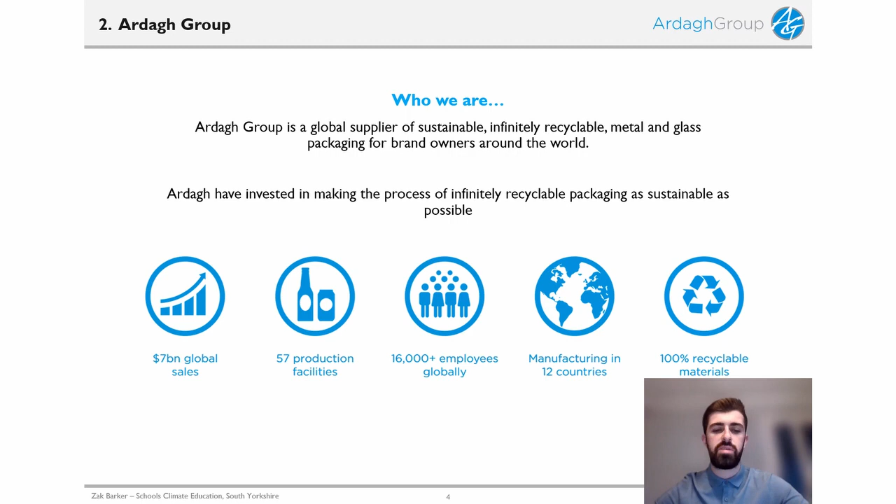And all of the products that they make are 100% recyclable. So everything is packaging, from glass packaging to aluminium packaging, so cans and glass bottles. At the Barnsley site, we focus mainly on glass containers for the drinks industry, alcoholic drinks industry, but we still tend to do a bit of Coca-Cola or Fever Tree tonics and stuff like that.

So this is bread and butter flat glass making. This is an 18 section glass forming machine at Barnsley where I work. This machine at the moment is producing Heineken bottles, I do believe, and it never stops. You can't stop a glass furnace, unless it's like once every 15 years where you're going to stop it and build a new one. So this machine is just continuously running. We never stop it, apart from occasionally maybe once every month, once every 2 months for a couple of hours to do maintenance work or change the job over.

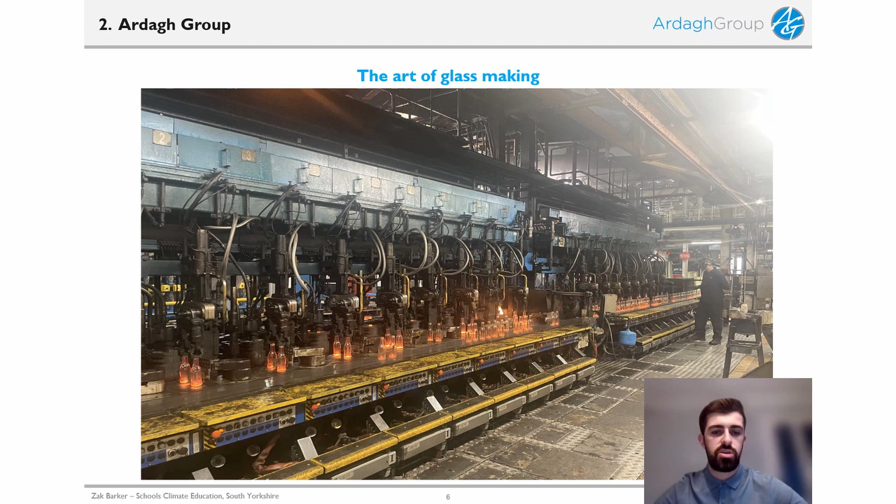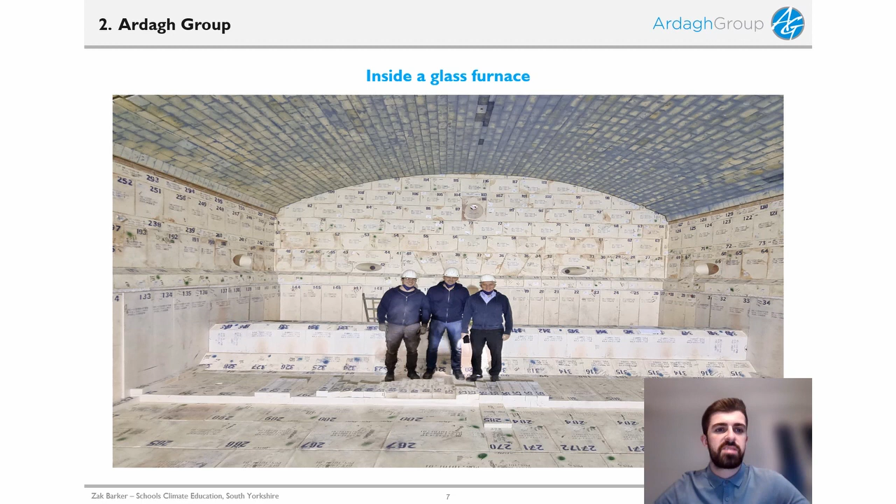This is inside one of the furnaces. It needs to be this large because of the amount of glass that we're making. So what happens in the furnace is you've got all your main ingredients of glass, you get it to your desired temperature, and then it's distributed out onto the machine. In here it can reach a maximum of like 1600 degrees Celsius, and then your glass drops into your machine at between 1200 and 1400 degrees Celsius, dependent upon colour, weight of the glass, size of the glass container, stuff like that. So it's a very hot process with lots of excess heat that never stops.

So the sustainability plan at Ardagh, what are we hoping to do? We're hoping to minimise greenhouse gas emissions, over all industry, but obviously my focus is at Barnsley as that's where I'm based. Minimise our ecological impact and engage with local communities.

So if you'd just like to pause this video and have a think before I move on, so if you can think of any benefits of studying through the apprenticeship route like I have done, whether that's intermediate apprenticeships, advanced or higher degree apprenticeships like I'm currently on, if you can think of any benefits to that as opposed to the regular route, if you'd just like to pause it here now.

So if you've done that, general benefits, which I've got from my personal experience: obviously you earn while you learn. You're attaining invaluable working experience at work, so in your practical role day to day, going into the factory like I have. But you've also got that theoretical knowledge which you're picking up at college or, for me at the moment, university. And the main biggest benefit of that is that you're becoming familiarized with the industry that you're in. So you spot key opportunities for improvements, you understand how things work better.

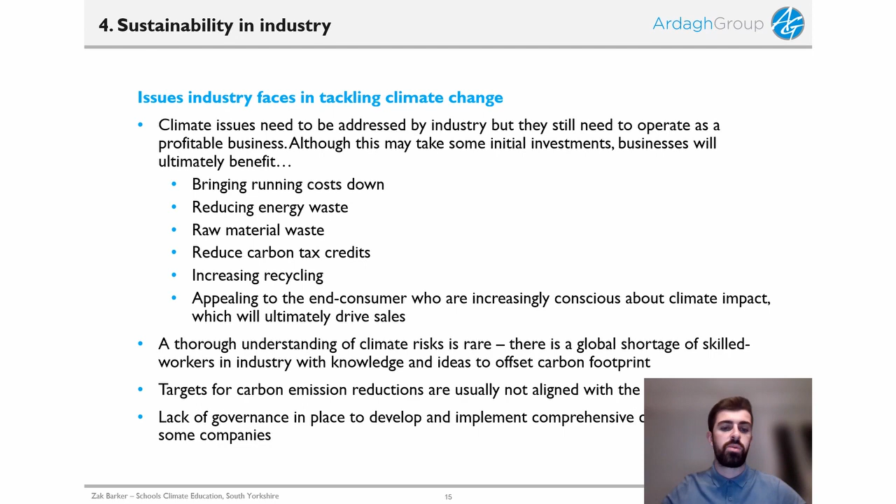So there are multiple avenues that businesses can take to reduce climate change. So, I mean, you don't even have to work in an engineering environment like me. You could work in HR, there's lots of different things that you could do. I mean, just considering and caring. So, cycle to work schemes stop people driving to work, or installing electric vehicle charging points, which is influencing people to get electric cars as they can charge them up at work for free.

Looking at recycling, looking at logistics. So companies are introducing green bonus schemes to staff who are driving sustainability, or by working directly in a sustainability role, which I'm doing at the minute as a project maintenance engineer on site. You can influence the use of resources to prevent further damage to the environment, tackling waste heat recovery.

So obviously, glass industry, like I've mentioned, it's a really hot industry. So a lot of that heat at the moment is wasted, and that's wasting energy. It's wasting money basically. So looking at how we can reuse that heat to the company's benefit, but it's also to the planet's benefit because we're not wasting energy. By reusing that, we're cutting down on energy that we're using from other places.

Engaging proactively with the community, so educating people on sustainability in industry, going into schools, talking to people, involving the community with what's going off on site, how we're tackling climate change. It encourages other people to tackle climate change. There's lots of different ways and avenues that this can be gone about.

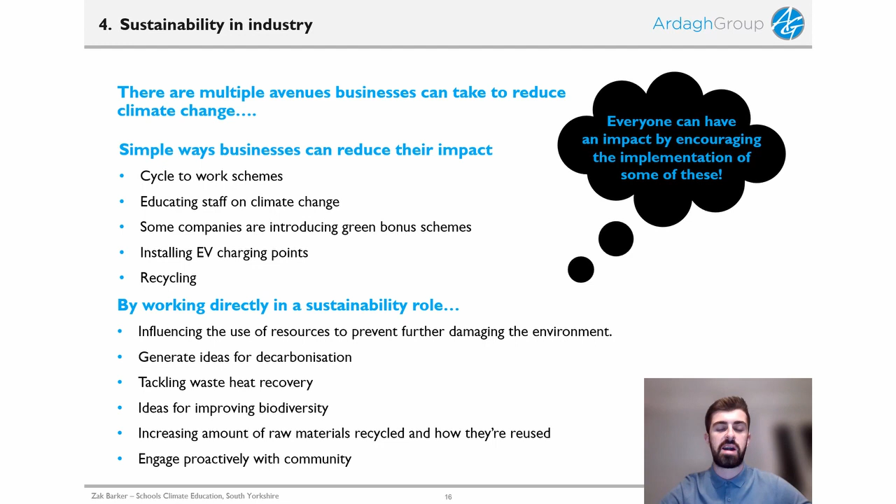I realise I've been doing a lot of waffling and not a lot of showing you what impact I've actually had. So current projects today, I've taken 420 tons of CO2 every year now out of the atmosphere, which is equivalent to the CO2 produced by 155 households every single year. So over 10 years, that's like 4,200 tons of CO2 taken out of the atmosphere, which

is massive. And for someone who's interested in climate change like I am and cares, it's an added bonus to your job that you feel like you're making an impact and that you're not just going to work and picking up a paycheck. You're actually making an impact on problems that are real life, out there outside of work, and that everyone's facing.

So my role, what it involves: I've already spoken about projects and how I identify gaps at work for efficiency, sustainability targets, and how we go about that. Some of the other things I do is look at improving all the technology, making it greener. I do this by designing systems, looking at alternative methods, using what I'm learning at university, what I've learned already at college on my apprenticeships, and the time I've spent in industry. I can look at different ways to target things.

So looking at alternative energy methods, doing pre-feasibility studies, understanding how much the current systems are costing at the moment, and then looking at how we can make that cheaper, greener, better for the environment. Obviously, we can promote that then, which makes us advantageous as we look like a greener company when we're trying to attract customers and more work.

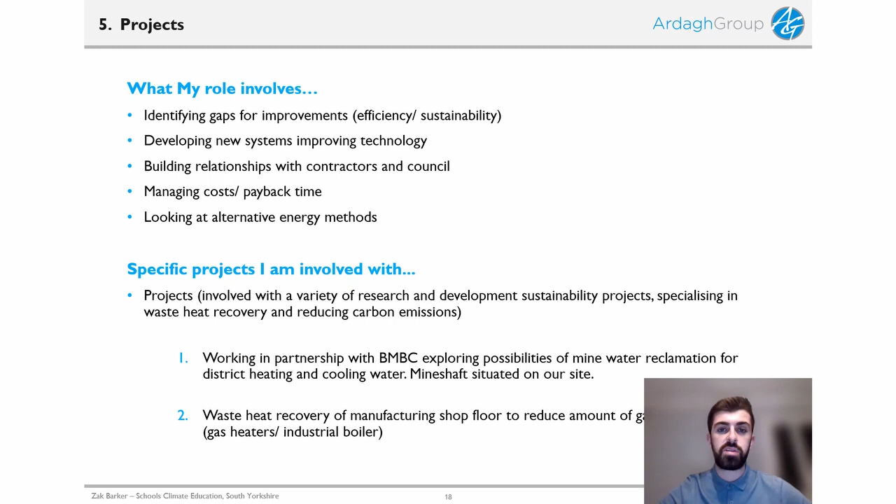So one of the projects I'm working on at the moment is looking at sourcing low carbon heat from abandoned coal mines. In 1984 in Yorkshire, we had 56 working collieries, so 56 different coal pits. They all worked on what we call 40 different seams, so seam 1, seam 2, seam 3. There were 56 because of different ownership and stuff like that. Gradually, as all these pits have closed, all these big underground mine shafts have flooded. Over time they're naturally flooded, and because of geothermal processes in the earth, this water is heated and kept at a constant temperature.

So the mine at Barnsley, from the data that we've took and cameras that we've put down the old borehole, is at like 20 degrees. So to use that for space heating in people's houses is very possible. It's a very green way of heating houses as opposed to what we've all got at the moment, which is central heating, so gas boilers or wood burners or whatever, things like that.

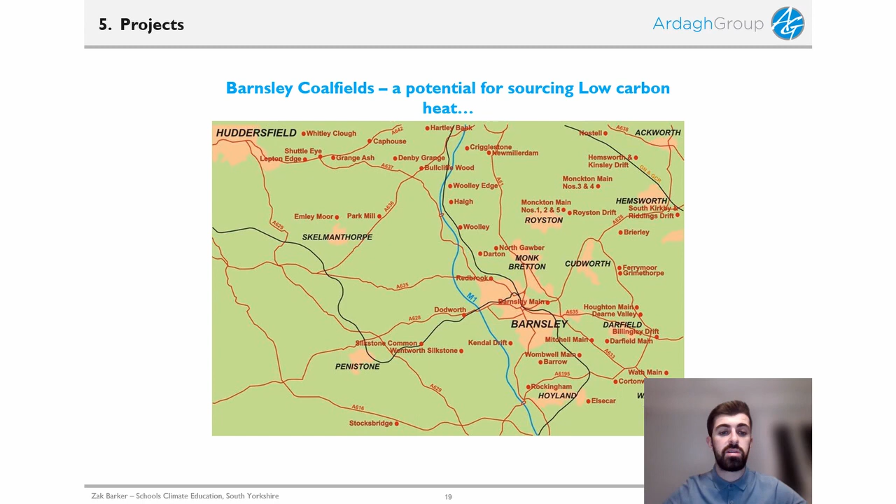So by working with the community and using our position as a business and what we've got on site to work with the community, we can look at bringing the CO2 down for Barnsley as a whole and not just Ardagh. So I suppose this concept of using heat from mine water, abandoned mines to heat people's houses is pretty new to everyone, as it was to me a few years ago until I started doing research and development into it on site, working in partnership with people.

So as we pump the water up using a heat pump, the heat pump runs the hot water over a heat exchanger, and inside the heat exchanger, you'll have like an antifreeze liquid, so a liquid with a low boiling point, so it might be propane or whatever. So if we're pumping water out the mine at 20 degrees over this heat exchanger, and then redistributing the water back into the mine, it's naturally heated up over time, so we can reuse it on like a closed loop system.

But the heat going into people's houses is the desired heat we need because inside the heat exchanger, we'll use what we call an antifreeze liquid, so it might be like propane with a low boiling point. And when we run this hot mine water, which is at constant temperature, over the heat exchanger, it gets this propane to the desired heat that is needed for space heating around the houses. So that's how that works.

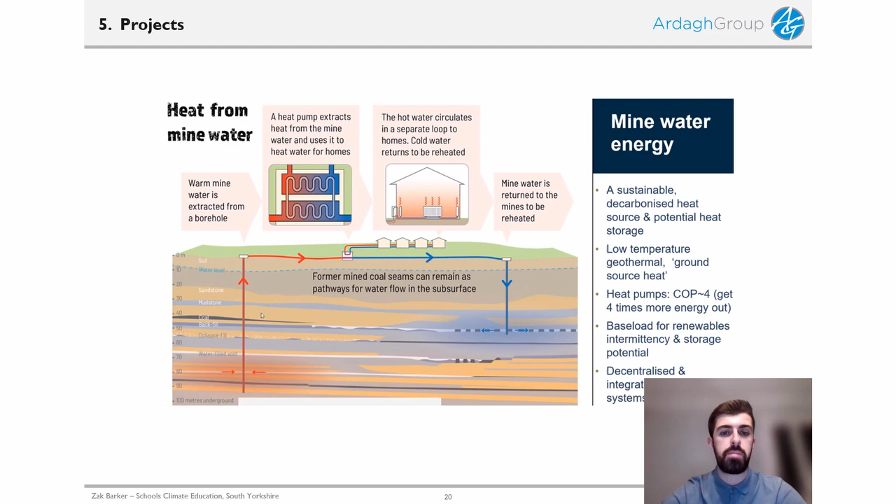So at the moment, what we're hoping to do this on is there's 1,500 new houses being built in Barnsley. So we're wanting to use this project to heat those houses and possibly a new school. So the carbon footprint reduction there is absolutely massive. So, like I've said, the effects on local areas, you get leveling up in community skills, so you get better jobs, more technologically advanced skills, so there's a need for more skilled workers, so you get more engineering roles, more HR roles, more people working in logistics, more water specialists, more environmental jobs.

So by investing in green, which we're all hoping the government carries on doing and at a faster rate if possible, we're creating more jobs for people in these areas. So increasing energy security as we're sourcing it from a local area, reducing fuel poverty in these areas. And like I've said, this project that I'm working on will reduce carbon footprint for 1,500 homes and a school.

So possible company benefits, what are we getting out of that apart from working with a community and obviously being bothered about CO2 emissions and global warming, climate change? There's some things that we might be able to use it for. So we might be able to heat buildings around site which are not close to the furnace. Maybe cooling water for the site. So it's a hot process. Maybe you're regenerating this water, using it for cooling different things.

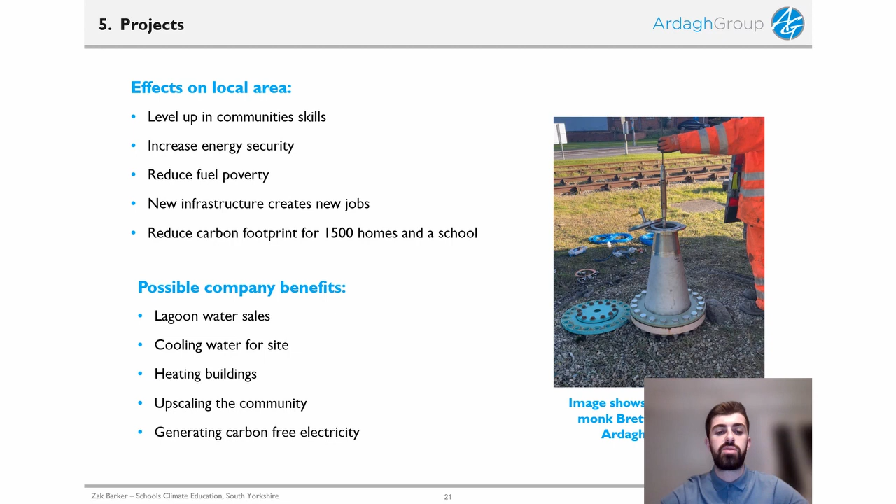But at the same time, like I said, we're upskilling the community and we could possibly even create carbon-free electricity from the heat that we've got on site as well as with the mine water, and then we could provide some of this electricity to the national grid, or use it ourselves. So lots of big benefits.

So as well as the mine water project, which I'm working on, a couple of projects that I'm leading is looking at waste heat recovery around site. So like I've spoken, we all know about now, we're a really hot process, the glass industry, like the steel industry. And we've got things around site like industrial scale large gas boilers. So looking at alternatives for these and how we might be able to use some of the excess heat which is coming off the furnace, off the manufacturing production lines.

So how we might distribute this heat, how we might recapture it, how we might remove the need for gas boilers. So one of the things that I've been looking at recently and just recently completed is removing 17 75 kilowatt gas heaters in the cold end, which is used for space heating. So a system that I've designed looks at using excess heat from the furnaces, cleaning that air, and then distributing it onto the cold end.

It cuts down on cost, it cuts down on CO2 emissions. We're reusing something that we didn't think was possible 10, 20 years ago, so we're moving with the times. And obviously there's a project which I've spoke about as well, using the heat pump system to capture the heat off one of the furnaces and use that for heating the industrial cleaning tanks. I mean, that project alone saves £45,000 a year, and it's cut down on like mass amounts of CO2.

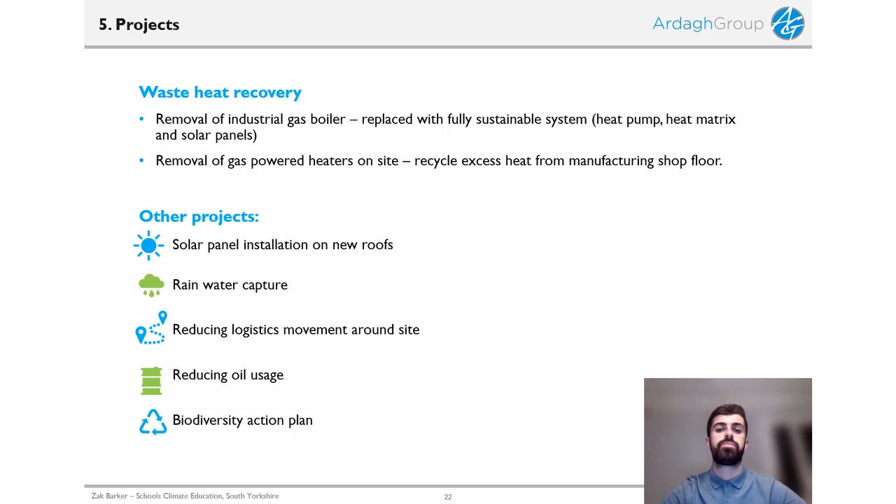So if you'd just like to pause this video here one more time and have a discussion, think about what roles there are increasing demand within sustainability. So whether that's in industry, there's lots of different jobs where sustainability is massively important now and how we tackle climate change. So if you just want to have a think about some of those ideas, whether they're possible things that you'd like to do when you leave school, jobs you might like to get into in the future, just have a discussion, think about that. And then you can come back.

Thanks for listening. I hope you've enjoyed this presentation. I hope you share the same enthusiasm that I do and other people do for tackling climate change and reducing CO2 emissions. I also hope I've broadened your horizon on different routes that you could take to getting into sustainability jobs, whether that's apprenticeship route, college route, going through a sixth form and then into university. There's lots of different roles to do that in. I just hope I've shown the benefits of the route that I've done, and the possible job prospects that are becoming more popular and more of them for the future that you might consider taking.